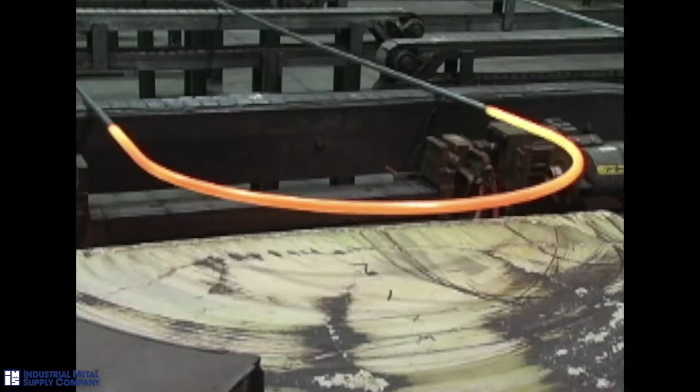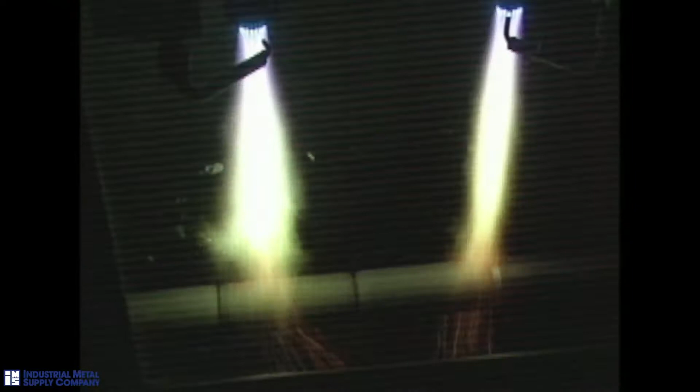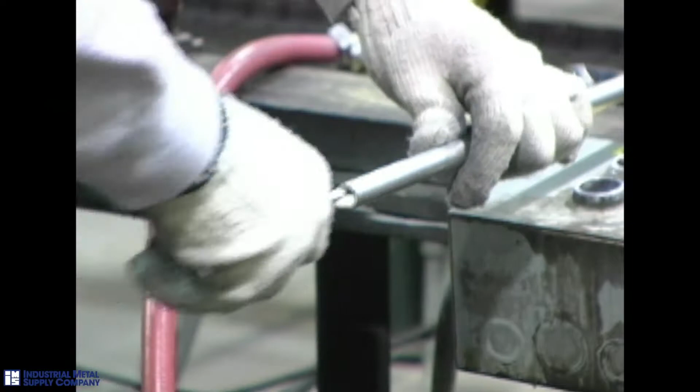United States. We manufacture tubing and extrusions, and our customers value us because of our years of experience and our highly engineered expertise to help them solve some very challenging problems that they have. Here in the United States, the largest challenge we have is the economy and rebuilding our revenue line. Number two, we operate in an environment that is not very supportive or encouraging for manufacturing. And finally, we compete with imports from around the world, from low-cost countries.

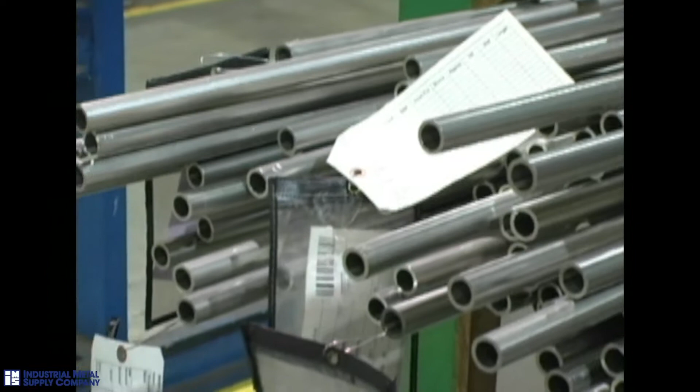Interestingly, though, we also export to those same countries where their engineers need a highly dependable, highly engineered product that we can supply. The company's products are at the heart of trucks and farm, construction, power generation, and oil and gas equipment. The company manufactures critical components for the commercial, aerospace, and defense industries. These components include parts for engines, landing gear, hydraulic control systems, and the fuselages of airplanes and helicopters.

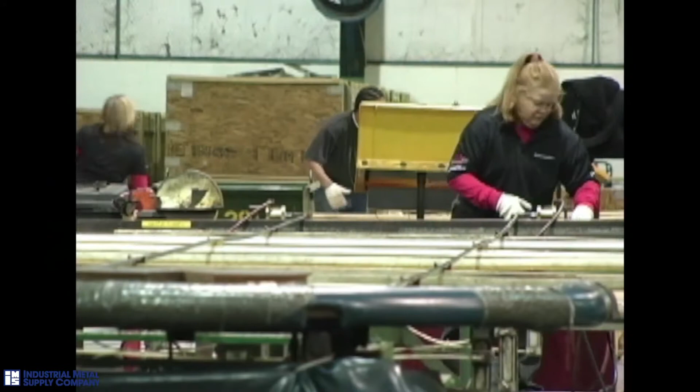Plymouth Tube Company has been in business now for 86 years under the same family ownership. You don't find that kind of stability in the business world very often today. For example, our products were used in the Spirit of St. Louis when Charles Lindbergh crossed the Atlantic. We were also involved when the nuclear industry first started generating power with very innovative products that nobody else wanted to supply. Today, the aerospace and nuclear industries represent significant markets for Plymouth Tube.

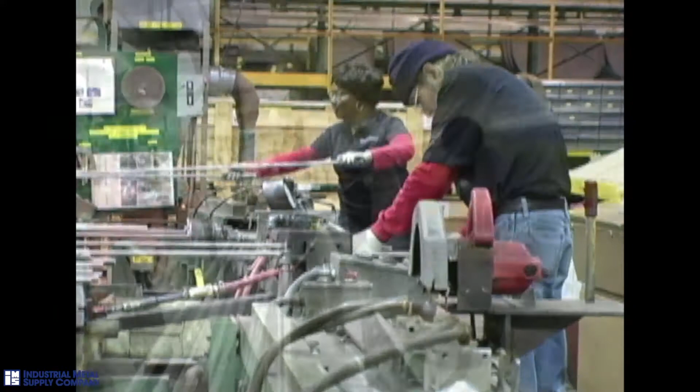Properly designed and manufactured tubing components offer higher efficiency, longer lifespan, and less downtime. There's a bright future for manufacturing in the United States for companies that are innovative and use the minds of their employees to compete around the world.

Streator is the mill that produces, I would say, probably 90% of our 4130. They also produce 4140, 1018, and 1010. It is all seamless. They operate in a 100,000 square foot warehouse. They've been in the building since 1968. We currently have 53 employees. It's a union plant, and we run 3 shifts. Right now we're running 3 shifts 5 days a week. We have the capabilities of running 7 days a week if we have to, but right now the carbon business has slowed down a little bit, so we're down to 3 shift days.

Originally, the plant was set up to enhance the Winamac product offerings, and I'll show you Winamac in a little bit. That's our hot finish mill that provides hollows to the Streator plant. Streator also buys hollows on the open market. Streator has focused on small diameter 4130, small diameter being 2 inch and under, and that's for distribution, aircraft markets, racing markets. Those are probably the 3 biggest markets that the mill has.

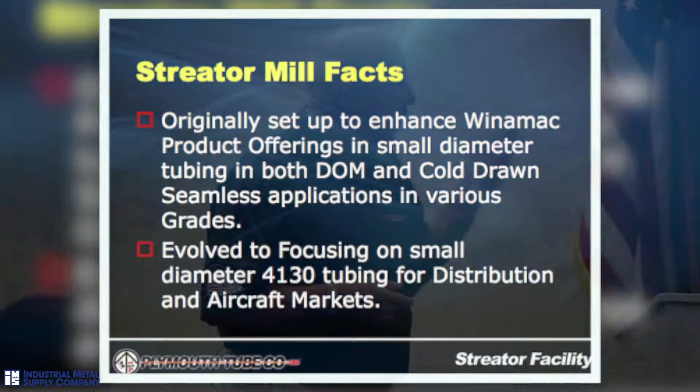It was originally a touring car mill. It was bought from a rail car mill, like Halladay. They refurbished rail cars. They took in old rail cars, made them new, and shipped them back to the railroad so the railroads could reuse the cars. It's built on top of mine shafts. The mine shafts are still there because if they had collapsed, so would have the building, and the building's still

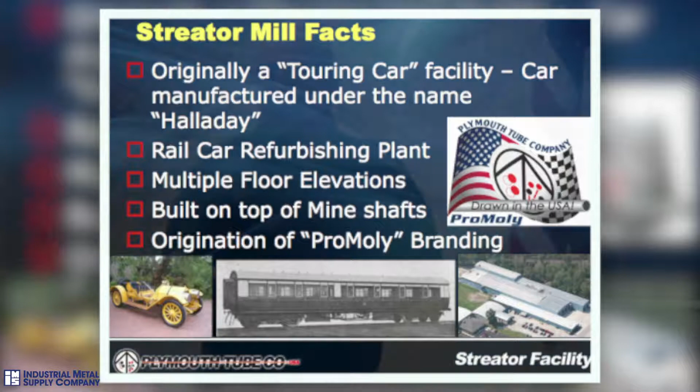there. Multiple floor elevations on the building due to the rail car manufacturing, so that when you walk through this plant, you're walking up, down, around, up, down, around. It's not flat. So you put on a good pair of shoes and hope you don't slip in the oil, although we do a pretty good job of cleaning. It's also the origination of the ProMoly branding, and ProMoly is a trademark for 4130, exclusively made by Plymouth Tube.

So if you see 4130 on any tube and it doesn't say ProMoly, it's not ours. Regardless of whether it says Plymouth or anything, it's going to say ProMoly on it. If it doesn't, it's not our tube.

It's a quiet surprise on the prairie, and you can't find it if you don't have a GPS. It offers tours of wind farms and haunted cemeteries, and it's located in 2 places at once because it's in the middle of 2 counties. Okay, the original bricks for the Brickyard 500 or the Indianapolis 500 or the Indianapolis Speedway were made in Streator.

We have a very strict safety and accident investigation policy. Everything is investigated. We take every step to ensure the safety of our employees, as well as the equipment itself. Focus and culture of Streator, and this is basically overall what Plymouth believes, is you do the right things in the right way for the right reasons.

To be different, you have to do things differently, which we have done in the past by just designing different alloys for different applications, working with engineers. We have a very extensive engineering department. We have engineers in all the plants, plus we have corporate engineers. So if anybody runs into an application that they think may not be able to be done, please give us a call. We have, between our stainless side and our carbon side, over 200 alloys.

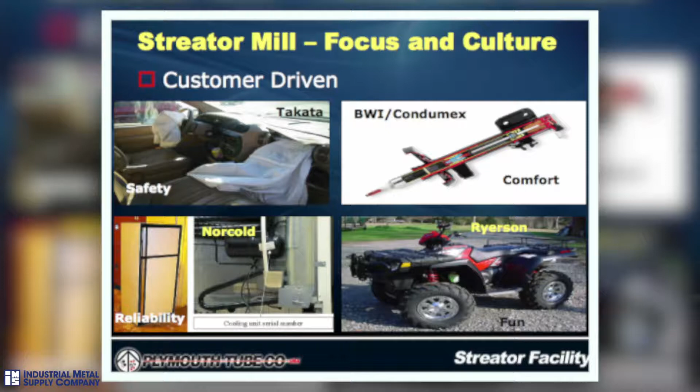These are some of the parts that are used that we make. We make the tubing for shock absorbers, the little tubes that are the ejection for the airbags, also refrigeration tubing, and parts for ATVs. This is an overall view of the Streator, Illinois manufacturing tour.

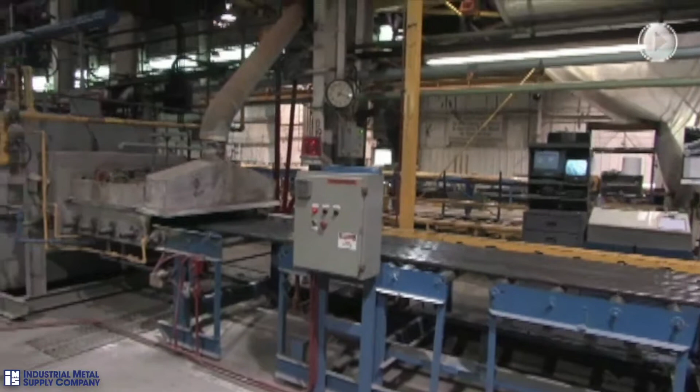After receiving our raw material, the first step in the process is to anneal the tubing so that it can be cold drawn. Our annealing furnaces are roller hearth furnaces that introduce a normalizing or soft anneal into the process. This subsequently gives us the ductility we need to produce the tubes.

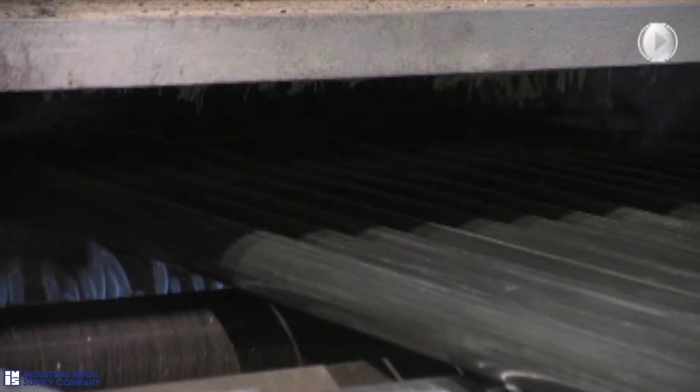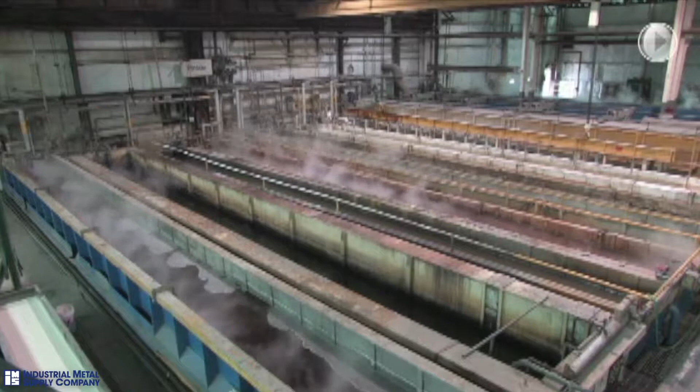The purpose of the pickle line is to apply a dry lubricant coating to the tubes in order for them to be subsequently cold drawn. The system is comprised of 7 tanks. The tubes are cleaned, subsequently acid etched, then introduced to a zinc phosphate subcoat, and finally a sodium stearate final coat. This final coat gives us the drawing ability for the cold drawing once the lubricant is dried.

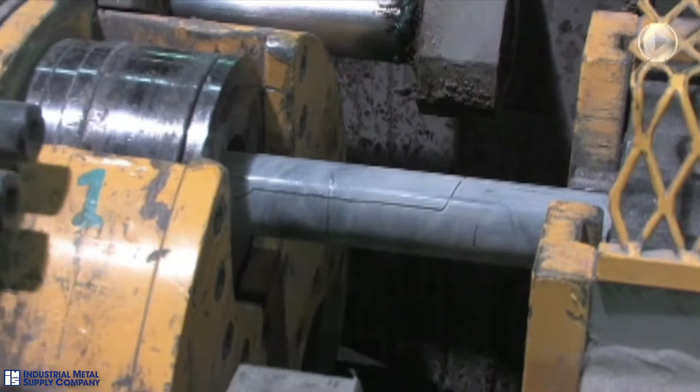Once the tubes have been pickled, they're transferred to our pointer operation. The purpose of the pointer is to put a nose or a point on the tube that is small enough to fit through the die for the next pass. Sometimes it's pointed for 1 pass or for 2 passes.

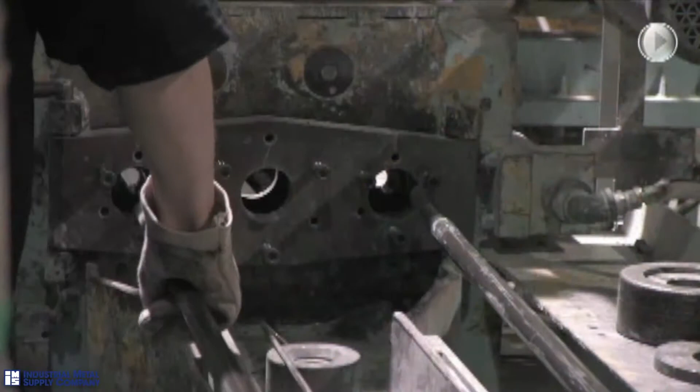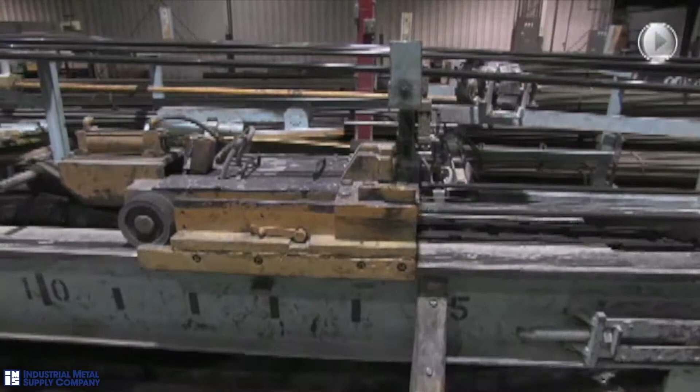Once the tubes have been pointed, we come to the draw bench. In the draw bench, the tube is run through a die and over a mandrel to reduce the cross-sectional area. We can perform this function twice in the cold drawing process before we have to anneal the tube again and repeat the process to further reduce the tube.

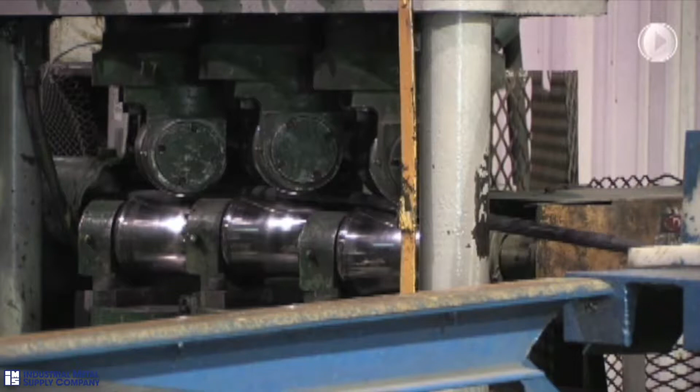Once the tubes have been drawn to their final size, they're transferred to our finish furnace where they receive a final thermal treatment. Once the tubes have had a final anneal, they're not completely straight. The 6-roll rotary straightener applies bend and pressure to the tube, enabling us to ship a straight piece of material.

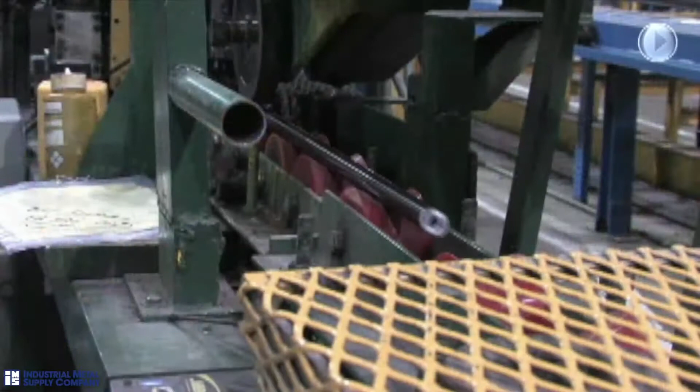Once the tubes have been straightened, they're transferred into our eddy current tester and subsequently our stenciling equipment. The eddy current tester non-destructively tests the tubing to ensure no defects, and the stencil is used to identify the tubing for the customer.

Once the tubes have been straightened and eddy current tested, they're transferred to the finished saw. The finished saw is utilized to cut the tubes to the final customer's lengths. After the tubes have been straightened and eddy current tested and cut to finished length, they come to our final

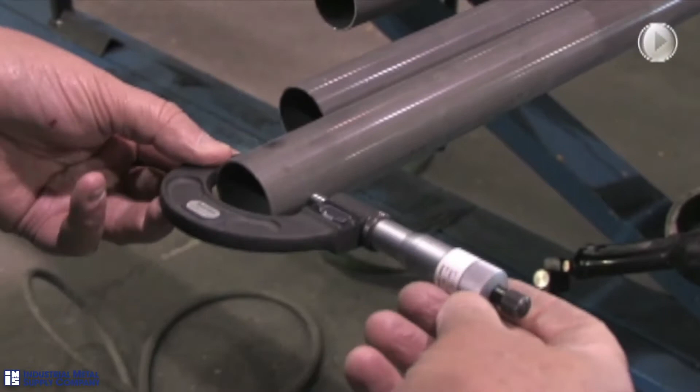inspection area. Our final inspection area consists of a final dimensional check, a check for length, a check for stencil, and tallying to the finished bundle size to meet the customer requirements. After final inspection, the tubes are staged and ready for shipment.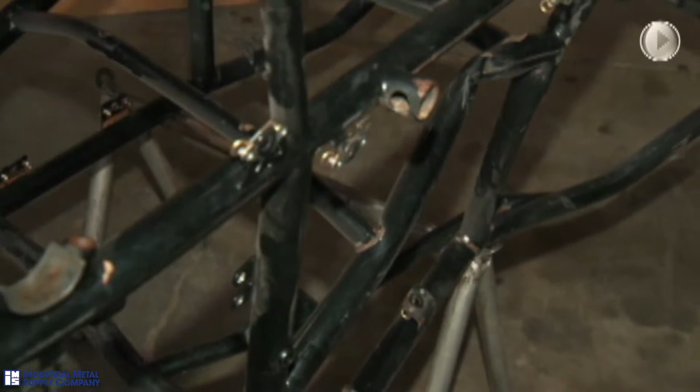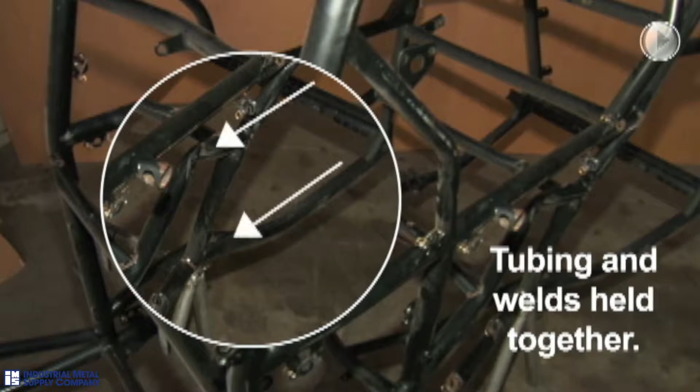ProMoly is a tube used in the racing industry that's a high-performance tube. It is tightly toleranced, has great formability, repeatability, and a superior finish that the fabricators really like because of its ease in the fabrication process for welding. Art Enterprises is a company up north of San Francisco. This is the actual frame that hit the wall.

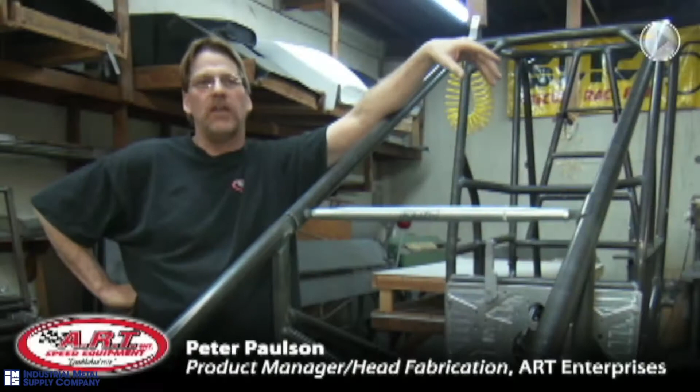I feel it's a much safer product because of the quality of weld you can lay down. Improves the safety of the car because a better weld makes the car hold up better in an intense crash, and that's the big thing right there. If I was a company starting out, I would definitely consider using ProMoly tubing. I mean, like I say, it's consistent and the bendability, and it's easy to work with. It welds great, and we find nothing better.

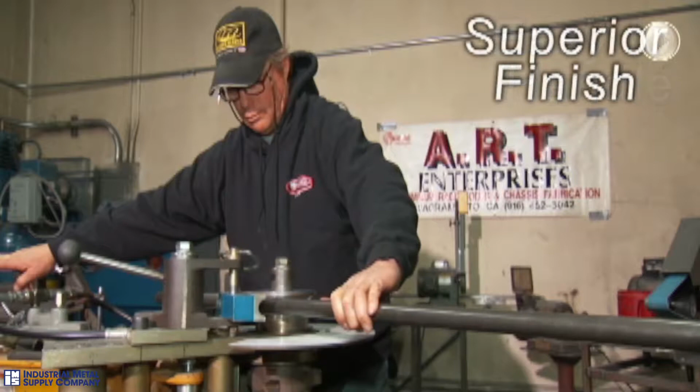I've tried other products similar to ProMoly, and the finish in the material wasn't as nice. It was more difficult to weld. It seemed a lot less pure than the ProMoly tubing. Yeah, well, through the years, all the manufacturers and fabricators know the style of material that they like. And it's hard to tell your tubing supplier, I want the good stuff, because what is the good stuff? And by being trademarked ProMoly, it was an easy way to say, that's the stuff. I want ProMoly, that's the good stuff.

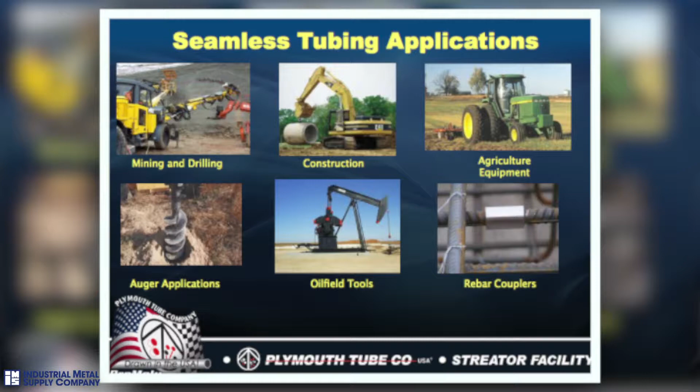We get inquiries from medical applications, which is really small stuff. That's not a big part of our business. Military, mostly in ammunition. Recreational would be ATVs, racing cars, little four-wheel carts that run around, and mining. Mining and drilling, construction, agriculture equipment, auger applications, oil field tools, rebar couplers. That's actually a tube that was made as a hexagon and then threaded on the ID so that they could just screw in their tools. And we do a lot of these type of shapes.

Steering columns, aircraft seating and components, 4130 for the seat frames, telescoping applications for downhole water testing type applications, airbag deployment in the steering column, small plane bodies, race car chassis. That's becoming more and more of a big thing for us. It was a lot bigger three or 4 years ago before the market tanked. But now as we're starting to pick up and the economy's improving a little bit, we're starting to see more and more of that. And the rifle receivers, the scopes, those are all made from 4130.

This is basically how we go to market: distributors like yourselves, we have a 5,000 foot minimum per size. While it seems large, it's also designed to protect you guys from your own customers. We had one inquiry the other day for 40 feet of 1-inch 095 4130. Okay, we don't do this and send it back to them. I get everything through me. All the inquiries you call in will eventually come through my email. So if they try to go through the internet and contact us, I get it first. So you don't have to worry about me or Plymouth trying to take your customers from you.

We don't do it. It's just not good business for us. We find very few customers that could make up for an entire distributor. And we just don't have the people, we don't have the time, we don't want to mess with it. So we don't do it. That's why we have distribution.

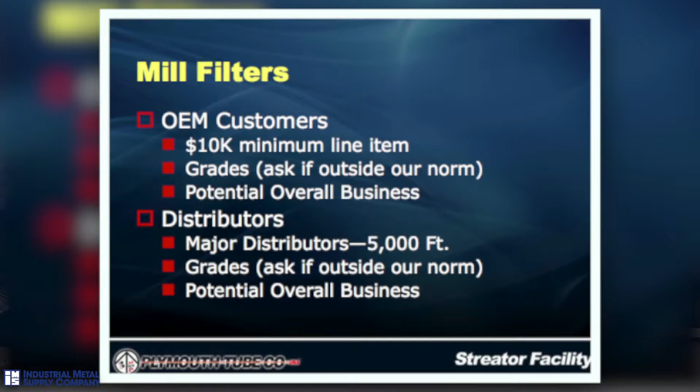If an OEM comes in, it's a $10,000 minimum per line item. So if they want to come in, we would still probably discourage it somehow, especially if we know that it's one of your customers and if we recognize the customer. The grades, you can ask for any grade you want, even if it's out of our normal, you don't see it in a brochure. And then we look at potential overall business on distribution. That helps us plan for the future as far as raw material acquisitions and staffing and equipment.

Tubing specifications, this should have been tolerances, it's not. But on the specifications, we'll do a MIL T6736. We also do the AMS 6360, which is the real new one. And then we do ASTM A519. If you've got a machining application and the guy's asking for A519, that's fine. All your quarter inch is coming in.

I think the 2-inch that is on the road now is dual certified. We can go back and recertify something if you absolutely need it to be done to A519. But if the customer knows what he's doing, he should be able to accept the MIL T6736 as an alternate because it actually has more testing. 1/8 inch through 2-inch out of the Streator plant.

Standard tolerances on the wall plus or minus 10. We can do in-house cut lengths from 4 to 40. We do charge an extra for anything that's not 17 to 24. Those are the random lengths. You can put in an order for 17 to 24, aim for 20, aim for 24, aim for 40. You can do anything you want that way and not pay an extra, but we don't guarantee you're going to get what you ask for.

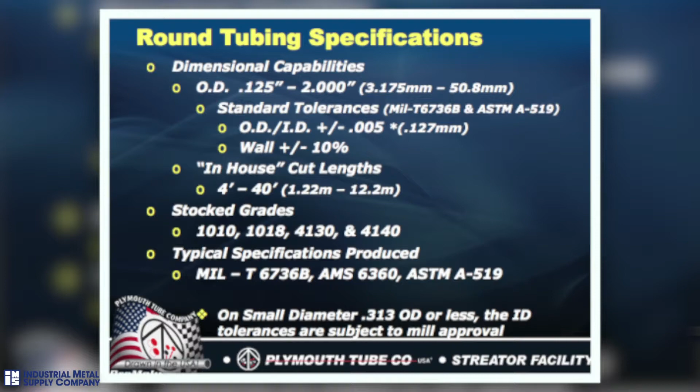Stocked grades, we don't stock any tube on the floor. This is raw material grades. These are raw materials that we do stock on the floor in hollows. 1010, 1018, 4130, 4140. Your specs are there. We can do the AMS specs, and usually if you've got a cleanliness requirement, we can handle that. You see more AMS in the aerospace than you do in the commercial end of it. Size ranges, they're on a chart that you guys have on one of the handouts.

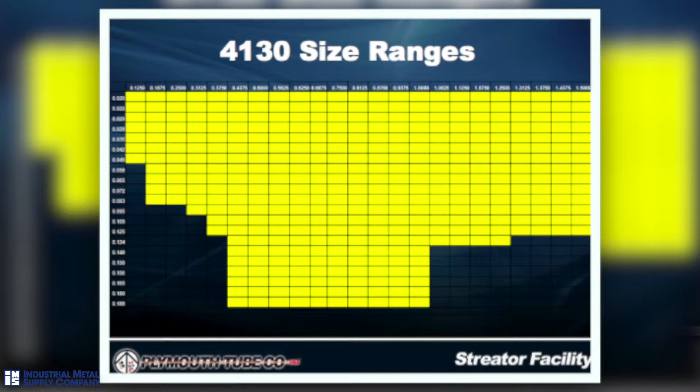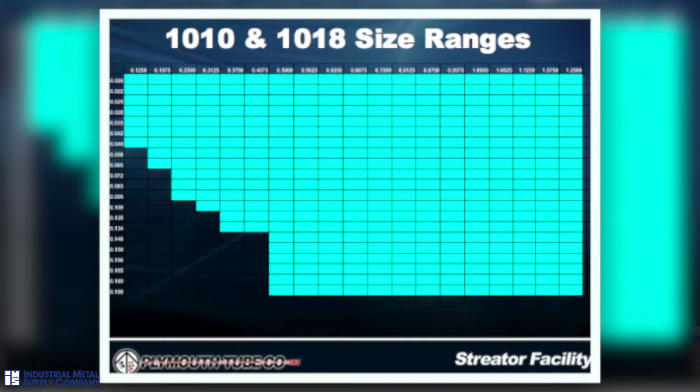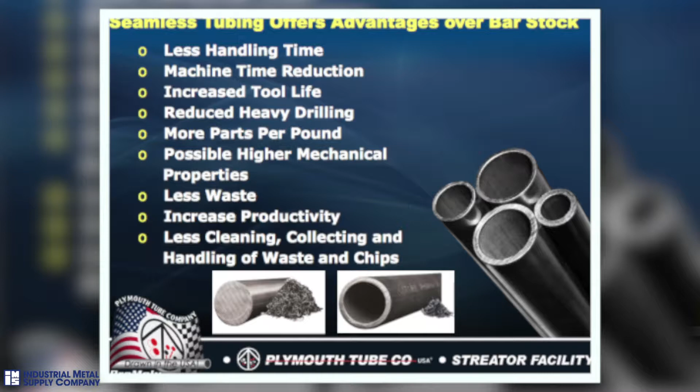You may be somebody that's using bar. These are just standard things that you can use. Less handling time, less machining time because there's no hogging. Increased tool life because there's not as much machining. Reduced heavy drilling, more parts per pound, possible higher mechanical properties, less waste, increased productivity, less cleaning, collecting, and scrap. If you got somebody that's machining out a bar and it makes sense to do it out of a tube, in other words, you don't have to gun drill a lot out or hog a bar out a lot, then you're probably better off to switch them to a tube if you can.

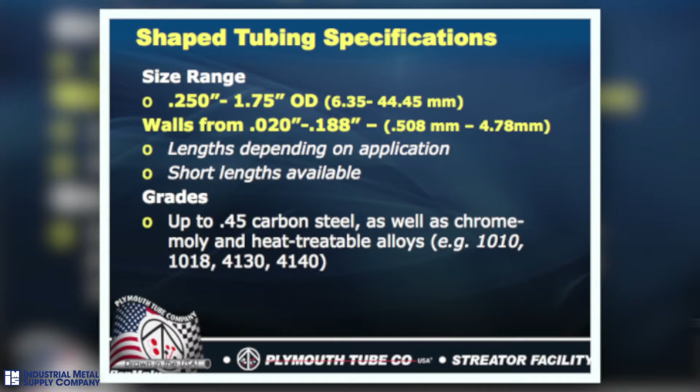We also do shapes. We do squares, rects, ovals, streamline. Any kind of shape that you can have a print for, we can do if it's within this size range at finish, which would be 1/4 to 1 3/4 OD, and the walls from .020 to .188. Lengths depending on application, short lengths available. We have a saw. I mean, we can cut. We can also do 4130, 4140, and up to 4145.

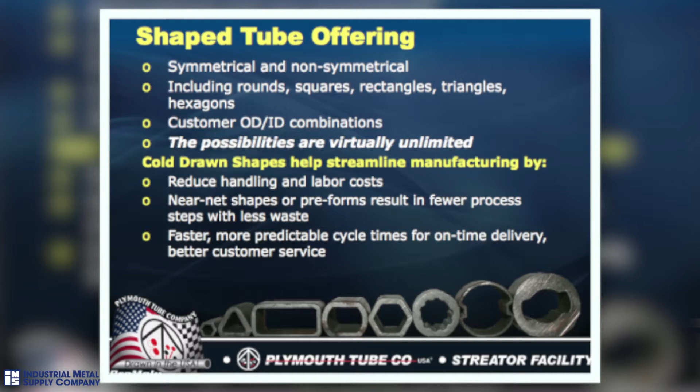Shape tubes, those give you an idea at the bottom rather than me read all that. There's squares, rects, hexagons. There's a splined ID carbon tube. That's basically what that part is; they were mating those parts. This part was made into this part. And these are near net shapes. So we gave him a part that was close enough for him to finish. And that's what we do.

We do have an extrusion mill, an actual extrusion mill that will do near net shapes. It's located in Hopkinsville, Kentucky. It's 100% OEM business. There's no distribution involved in this plant just because of the technical aspects of the product itself. So if you call for an extrusion, even if you have a part number, you may or may not get an answer. I'm going to warn you. And if it's really something you need, please call me, and I'll see if I can do it, or I can see if I can get them to quote it.

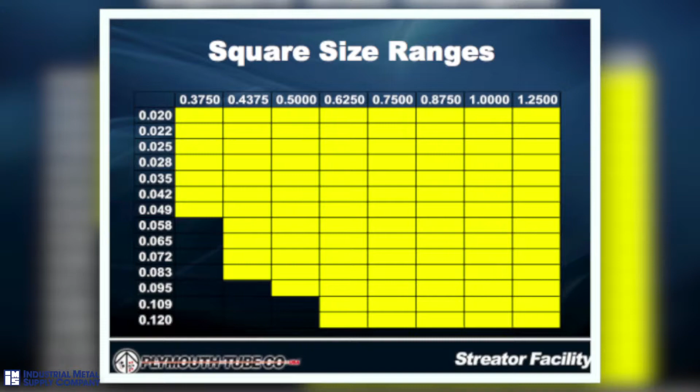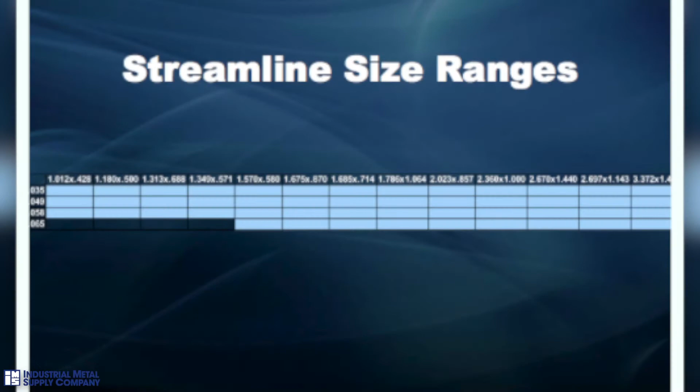Square size ranges from 3/8 square .020 up to 1 1/4 .120 wall. Rectangle size, 3/4 by 1/2 by .020 up to 1.5 by 1 by .095. Streamline size ranges, 3 dimensions. You have the part that goes this way, then you have the part that rounds, and then you have the wall thickness. And they vary from 3 3/8 down to this small, tiny.

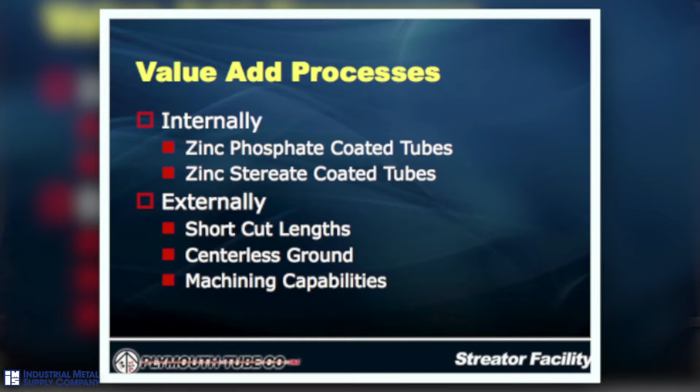We do have the capability of centerless grinding. We also have machining capabilities if you have a machined part. We have certain equipment back in Streator. If somebody's got an interest in having us finish a part for them, just send me the print and let me know what you want to do with it, how many pieces you want, and we'll see if we can help you. We'll respond usually within 24 hours or the same day. Our lead times right now are 4 to 6 weeks. We can possibly get it out in 3 to 4 if it fits in our production schedule.

We have a no-fault return policy. In other words, if you get tubing that you don't like for whatever reason, it's out of tolerance, it's got scratches, it was handled improperly, you send it back, we remake the order. The whole order goes back. We remake the whole order and reship it to you. And there's basically no questions asked. I may ask you to send a sample ahead of time so that they can evaluate it and see what the problem was before they start the remake.

Small diameter heavy walls, that would be to us like a 1-inch .188 wall. We're capable of doing that. We're ISO certified. And if you have any questions, ask. You guys can always email me or call me on my cell phone.

I'm usually available 7 days a week, unless I'm at the river. Then I don't answer the phone. I'm just telling you that.

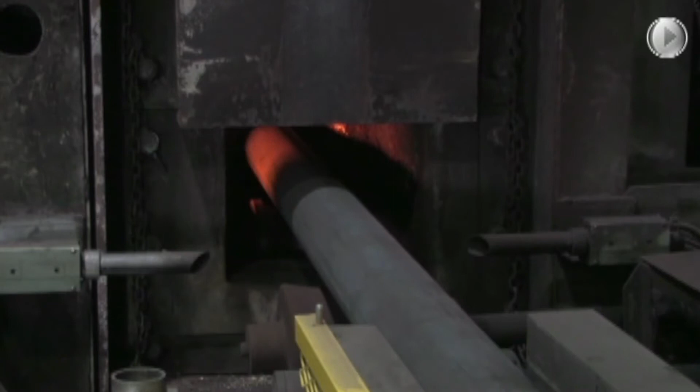Okay, I'm going to show you this because this is the hot mill. There's no sound to this. I'm going to kind of overtalk the video, but this is basically how we get the hollows to Streator to get redrawn into tube. You're starting with bar. Take it inside, drop it on a table. Stick it in the furnace and just heat the living bejesus out of it.

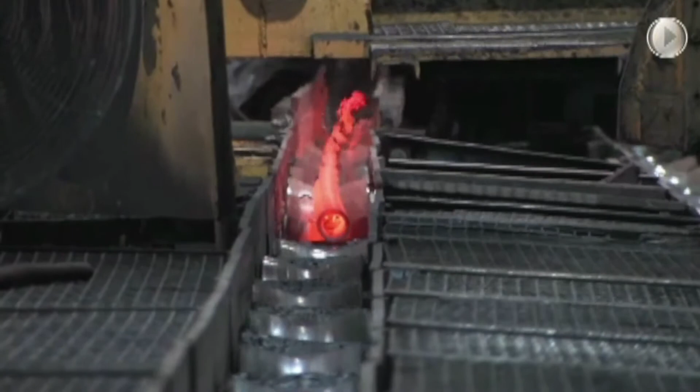Okay, here you go. Watch this. There goes the ram. Instant hole. The ram's coming through, piercing the tube all the way through, comes out the other end looking like that with the hole in it. Then it's descaled. It removes the scale. It's coming out of the annealing furnace. You notice how nice and straight it is.